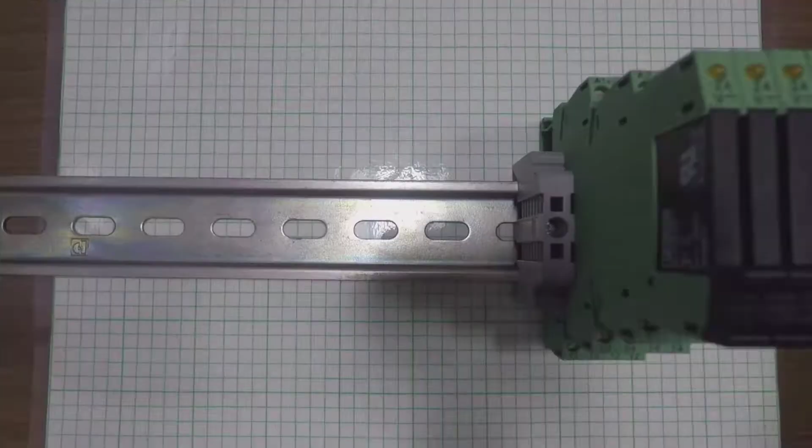We're going to start on a new Solidworks model. We're going to do a DIN rail. DIN is D-I-N, capital D-I-N. It's just a standard, like an ISO standard or an ANSI standard. It's mostly a European standard, and it's a component you can see on the camera here. This is the DIN rail, used to mount different types of electronic components. In this case, relay sockets, relays, terminal blocks, and you can mount things like power supplies and a ton of other stuff. It's very versatile because these things just snap on and off. You don't have to bolt them down, unbolt them, or drill holes. They just snap on and snap off. So it's very useful.

We're gonna model the DIN rail itself, and then later on in the semester we'll do a project where we use that DIN rail to create an electronic assembly as part of our final design project.

So let's go over here and look at the details of the DIN rail. And so here's our DIN rail. This is a cross section through it.

What you're going to do is go to Google and search for an NS 35/7.5 DIN rail. Those numbers relate to the overall width and the overall height of the DIN rail. You'll see that once you get to the data sheet.

And the company that I want to use as a manufacturer—lots of people make these DIN rails because they're all made to the same standard—but Phoenix Contact is one I'm familiar with, so we'll use Phoenix Contact. Do a Google search on Phoenix Contact for an NS 35/7.5 DIN rail made out of zinc-plated steel and a length of 2,000 millimeters.

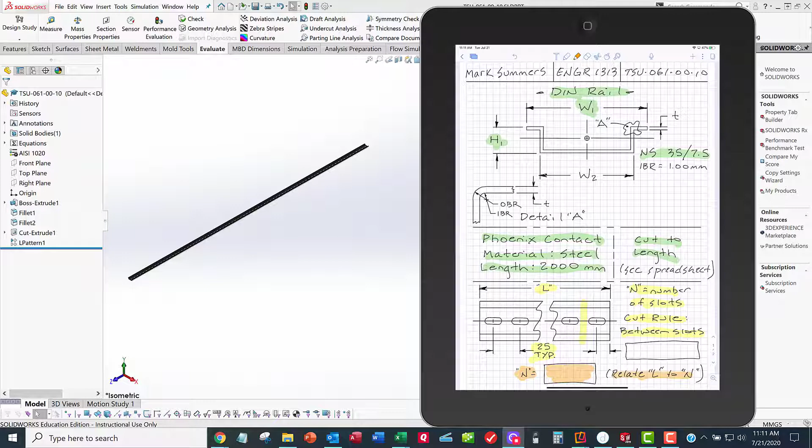So that'll be part of what you do. You find the data sheet, do a Google search, find the data sheet, and once you find the data sheet, then you can go in here and come up with your relationship for N—an equation for N as a function of L—and then we're ready to start the CAD model.

So let's get started.

So here's our finished CAD model, and it doesn't seem right to start from the finish line, so I'm going to say File, New. We've got our templates installed, so I'm going to use my millimeter part template.

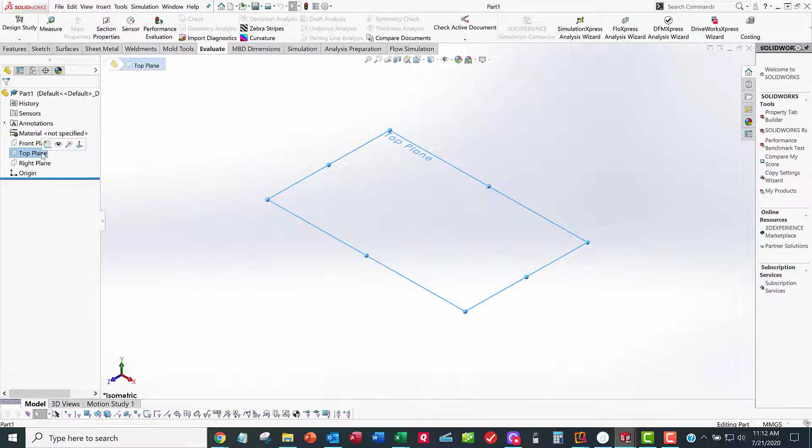I'm going to get my ISO view. I want my orientation of my DIN rail to look just like what you just saw on the screen, so I'm going to go to my ISO view, and I want to do my first sketch on the front plane and extrude normal to the front plane so it's oriented like I want. I want the bottom of the DIN rail to sit on the top plane, and I want the right plane to go right through the middle of the DIN rail.

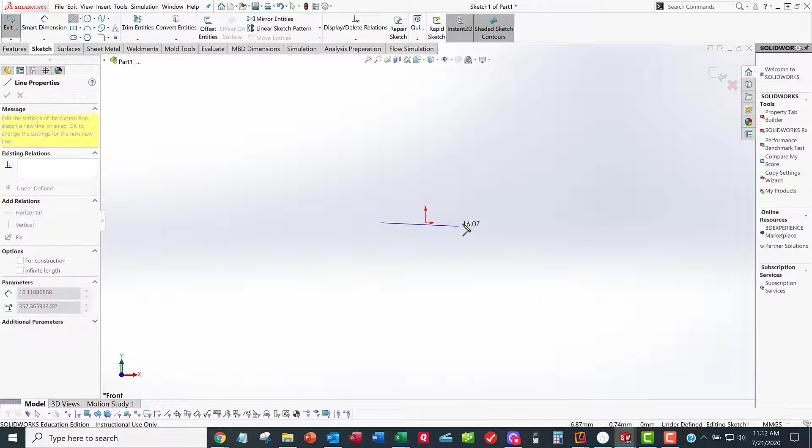So with that in mind, I'm going to select front plane, go to sketch, and sketch on the front plane. I'm going to do my sketch, and I'll leave the fillets off because that's the way I like to do it. I don't like to do my fillets as part of the sketch—I like to do my fillets as a feature.

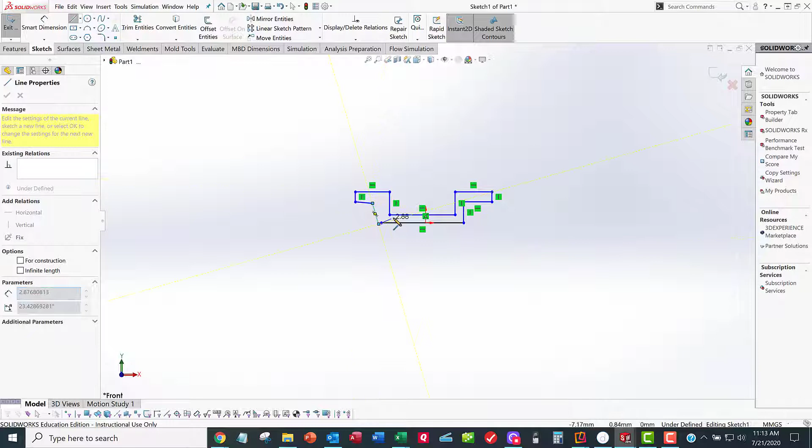Here I'm being somewhat careful to draw my lines horizontally and vertically, and I think I'm doing a relatively good job, but maybe I screwed up somewhere. Right click select to get out of the command. Unfortunately I wasn't paying attention.

So I need to make a closed loop—you always want a closed loop for your extrude sketches. I'm going to select one of these vertices and control click the other vertice, then make a merge constraint to make these two points the same point. Click one, control click the second—they're both in the blue box, and I want to merge them. So that looks good.

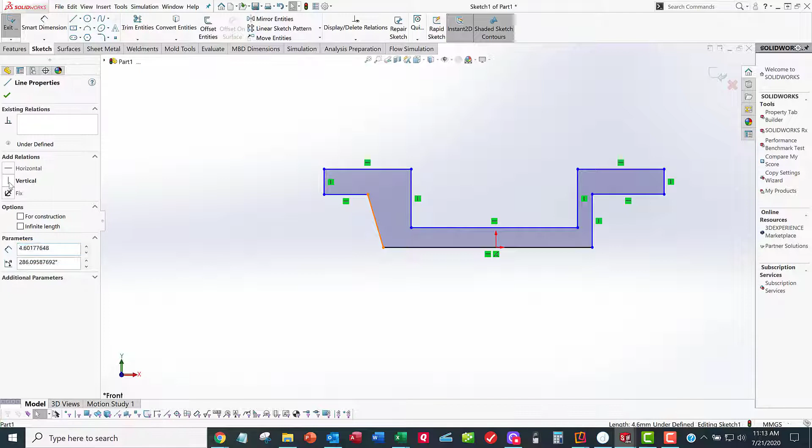It's not great though. This line here should have been vertical, so I'm going to select it and make it vertical. I suspect you'll be paying closer attention when you do your sketch, so you won't have to clean this up, but in case you miss one, that's okay. Here it got kind of cattywampus, but if I drag that over, I get my closed loop.

All right, this is why they call these things sketches. This is not an AutoCAD type drawing where all these line lengths are all the same. This looks horrible, but that's okay because it's a sketch.

What I want to do, like we did on assignment 9, is drag a blue corner around and find something that needs to be fixed, then fix it. I can see that this line and this line need to be collinear, so I'll make them collinear and say okay, then move on to the next thing. What's the next thing? I have no idea until I grab one of these vertices and drag it around.

This thing should be moving along with this thing because these are equal length—this is symmetric about this plane. So I'm going to select this guy, control click this guy, and make these equal length. I keep adding geometric constraints until the entire sketch is geometrically constrained.

Here's another goofball issue—this thing right here should be moving up and down when I move this up and down. I can fix that by making this line and this line equal, or by making this line collinear with that line. Doesn't matter which one you use. So I'm going to select that one, control click that line, select equal.

As I add these constraints, you see them showing up on the sketch here. There's equal, that's got a pair over here—these both highlight together. Here's another equal, here's a collinear. These constraints—you need to get familiar with these symbols. They're kind of hieroglyphic looking at the beginning, but you'll get the idea after a little while.

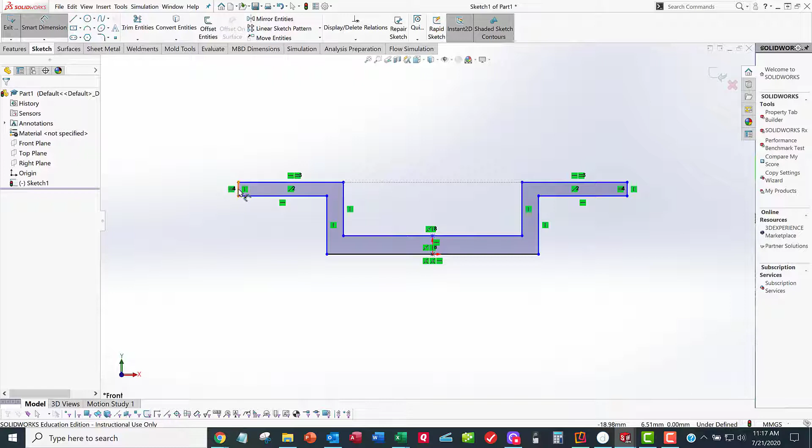I'm going to go to Smart Dimension. I don't go to corners, I go to edges. So there's edge there to this edge here. Click to place it, click to change the number, 35. And I hope these numbers are right. They're probably screwed up. But the data sheet, you got to find your data sheet.

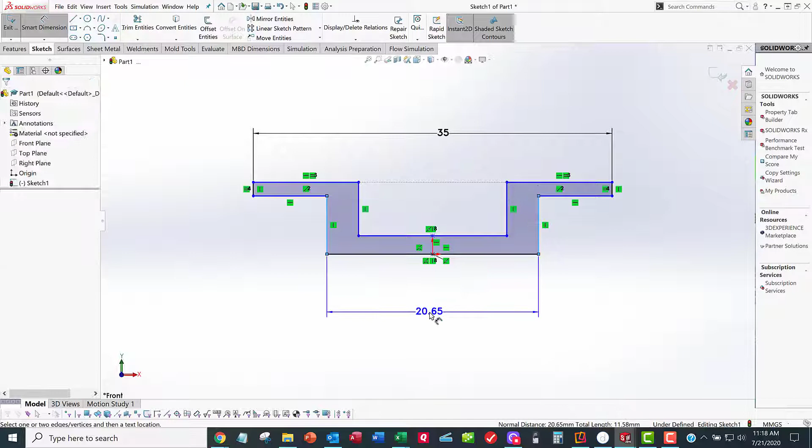And then I want to go, as soon as this thing comes back to life, from this edge to this edge, I think it's 27. Click to place, click to change, 27. Here to here is 7.5.

Now the thickness of this thing is 1 millimeter, and so I want to go from here to here. It starts off with a, whoops, that's not what I wanted. What in the wild world of sports is going on here? Smart Dimension, here to here.

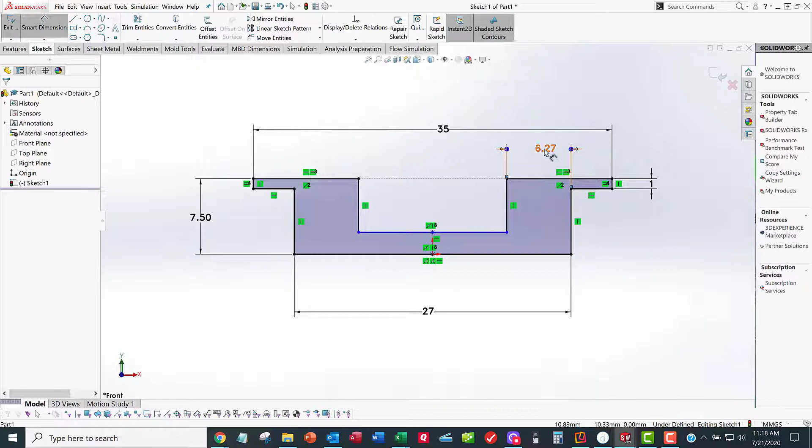There we go. Click to place, click to change, 1 millimeter. Here to here, it's also 1 millimeter. The thickness of the part doesn't change because it's stamped out of a single piece of steel. So all of these are going to be 1 millimeter.

And I go around the horn here, and the thing's starting to turn black. Wait a minute, fully defined. Why didn't I have to define this width here as 1 millimeter? Well, because of these other geometric constraints.

So I want a minimum number of dimensional constraints. I don't want to have a bunch of numbers on here. I want to have geometric constraints and a minimum amount of numbers. And all these numbers are on your data sheet.

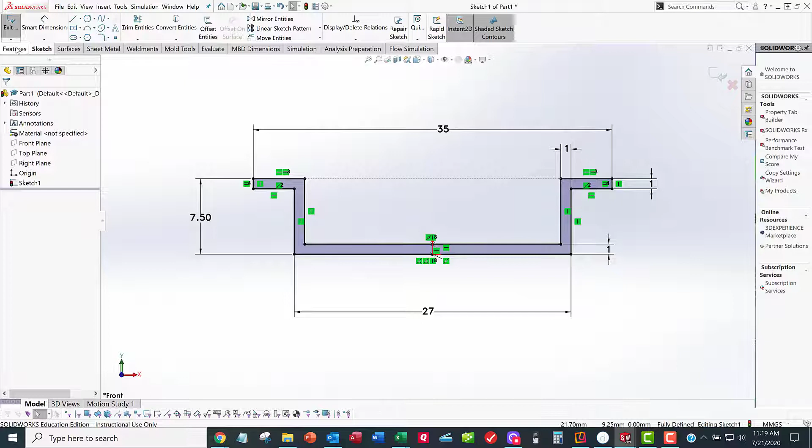No more than what's on the data sheet. So once you get fully defined, you can get out of the sketch. I'm going to do a space bar and do an ISO view. I want to pre-select the sketch, go to the Feature tab, Extrude Boss Base, 2000 millimeter depth. Boom, I got my first feature.

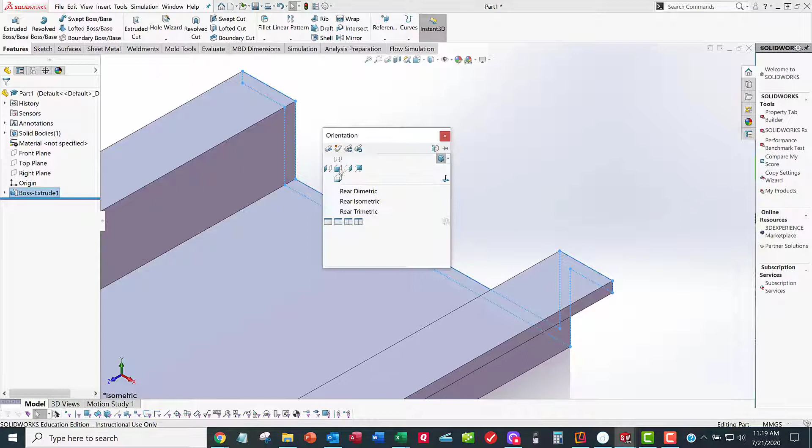Now it's time for the slots. Spacebar, I want to look down from the top. I want to come over here where the origin is, because I want a dimension from the origin to the slot. I want to sketch on this face right here, so I'm going to say Sketch.

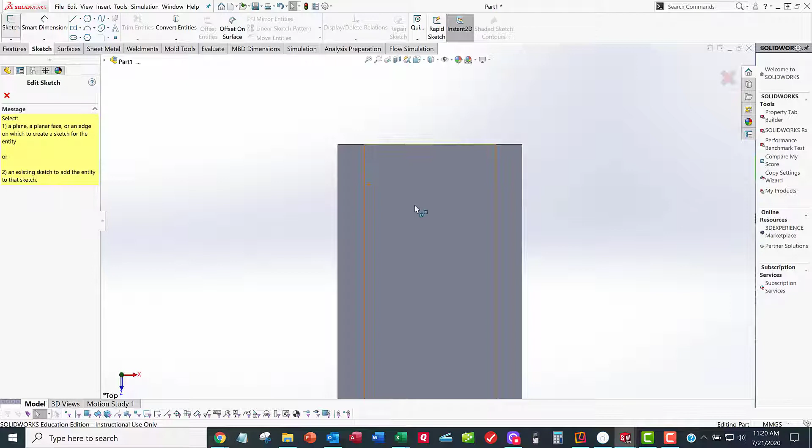Come on, baby. I don't want to wait. Sketch, tab, sketch, select that face. Now I'm in sketch mode. I can tell I'm in sketch mode because of this and the buttons pushed down.

Now it's time for a slot. I could do circles and lines, but I'm too lazy. I want to choose a straight slot. I want to click right there, boom. I want to click right there, boom, and I want to click right there, boom. Right click select. Now I've got my geometrically constrained slot.

Now all I need is dimensions. So I'm going to go Smart Dimension. I want the width of the slot. And I don't remember what the number is. This is probably wrong, so don't copy it.

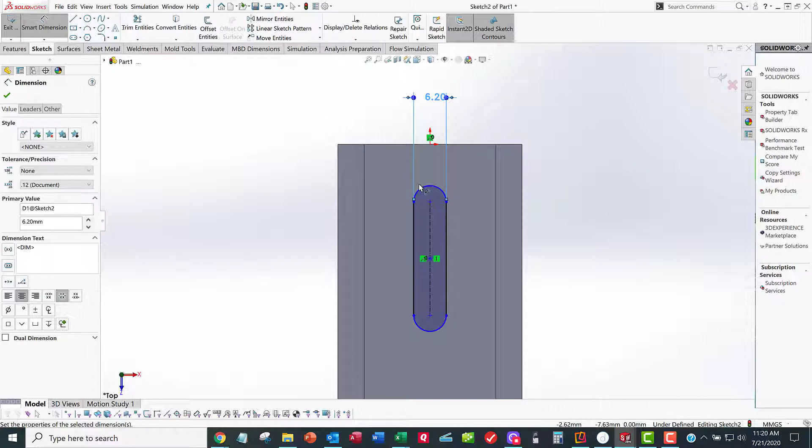Look at your data sheet. I want to go from, I want to dimension the length of the slot. This is 15, I think. I don't know, check all these numbers.

And I need the slot located to the edge. Well, I don't have anything on the edge here, but I've got this edge here that's not in the sketch, but it's part of the model. So I can dimension from this edge to the center of the slot.

And if the slot distance is 25 between slots, I know that the slot to the edge is half of that, because I want to cut the DIN rail equally distanced between each slot.

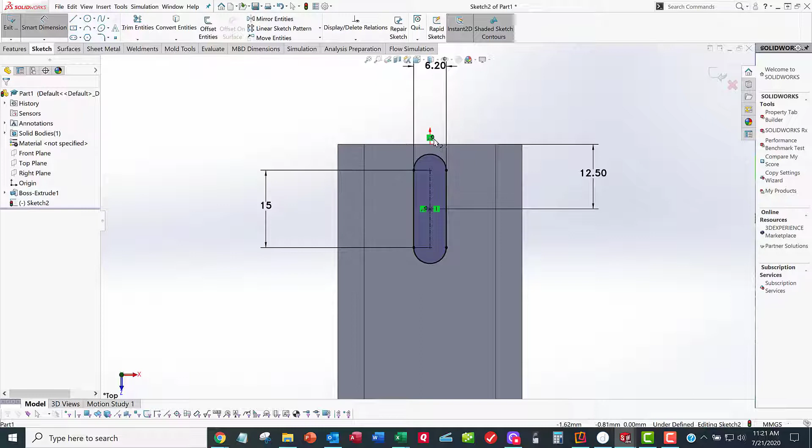Now something's wrong here. This dimension of 15 is correct, but it's dimensioning to the center of the arc. It's supposed to be dimensioning to the total length of the slot.

And so I'm going to select this dimension, and not knowing what to do, I'm going to right click on it, and I want to select it. I get my properties box over here, and I've got all kinds of options that I don't know what they mean. But one of the options here, under leaders, is arc condition: first arc condition, second arc condition.

I don't want a dimension to the center. I want to go to the max. So watch what I click this button. Watch what happens.

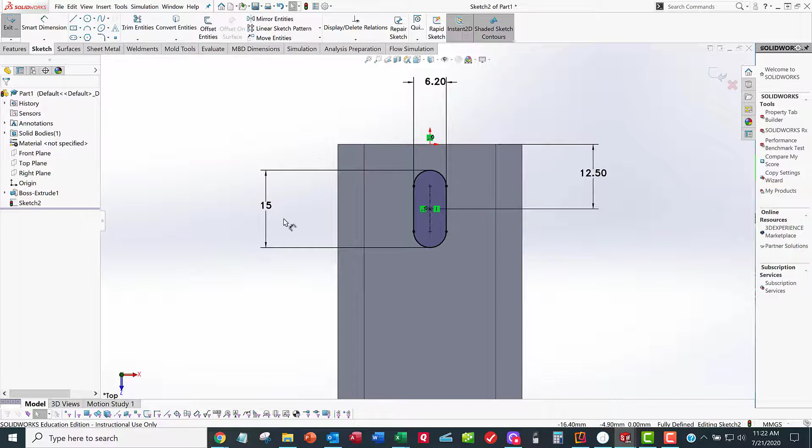Takes me to the maximum distance, which is the quadrant of that fillet or radius. I'll do the same for the second arc condition, and they'll both pop to the outside edge. That's what I want. Now the number's not right, so I'll go back and put in the correct number. Now what do I have? A beautiful thing, because it's fully defined with 3 dimensions, that's all I need. I don't want extra dimensions, I want everything geometrically constrained.

Now I'm going to spacebar to ISO view and look down on this thing. Now I'll do an extrude cut. I'll select the sketch, go to features, and do extruded cut. It's going to go 1 millimeter through, but that's not my design intent. My design intent is through all, in case the thickness changes.

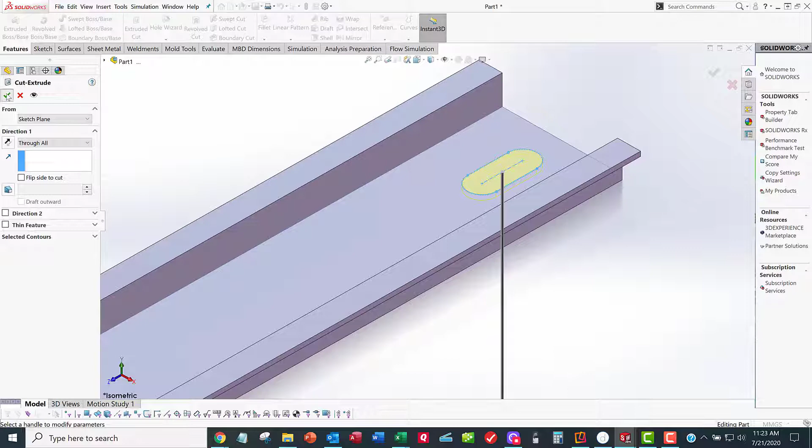So now I've got 1 slot. I've got to do this 79 more times. There's 80 slots in a 2,000 millimeter long DIN rail, and it seems ridiculous to do the same thing 79 times more. So I'm going to do a pattern instead. Patterns seem like the way to do it.

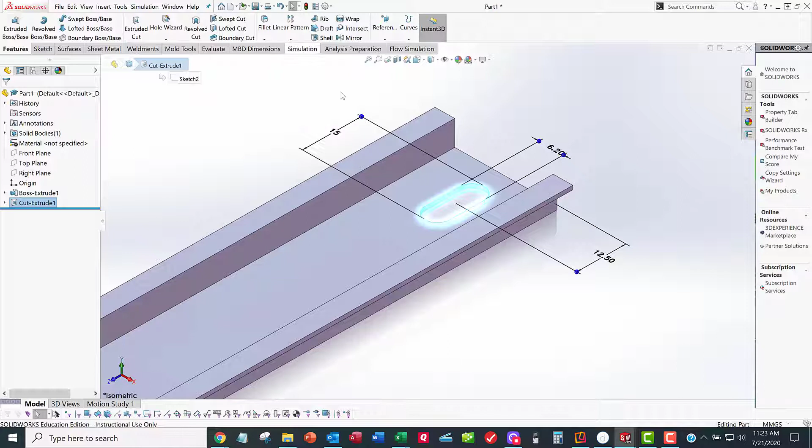So I want to pre-select the sketch, pre-select the feature. The sketch is underneath the feature, and these are all fully constrained because there's no minus signs, so I haven't lost 5 points yet. I'm going to pre-select this feature, come up here and find linear pattern. There's lots of patterns, but the one I want is linear pattern. I've already pre-selected the feature, so it knows which one I want to pattern.

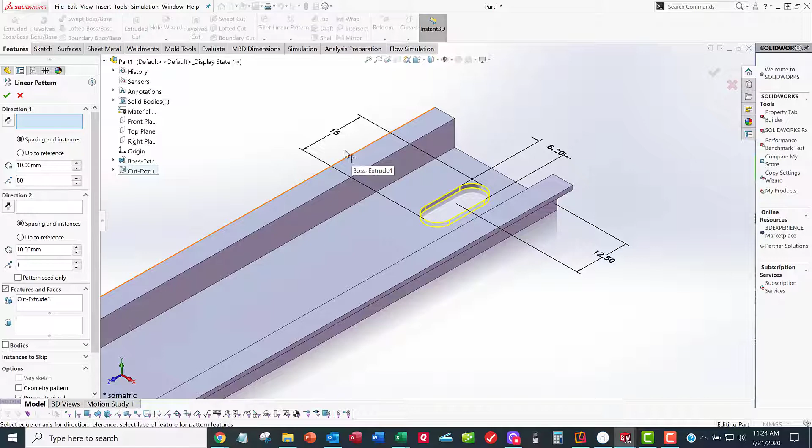Direction 1, I have to somehow define. I can define direction 1 by the front plane, going perpendicular to it. I could grab this edge - that edge is also along the direction I want. So any kind of feature you can find will define the direction.

Now I'll come down here. It asks, what's the distance between each instance? Well, it's not 10, it's 25. It gives me a nice preview, and there's 80 of them total, so I'm done. Boom. Now that feature gets replicated 79 more times, 80 total.

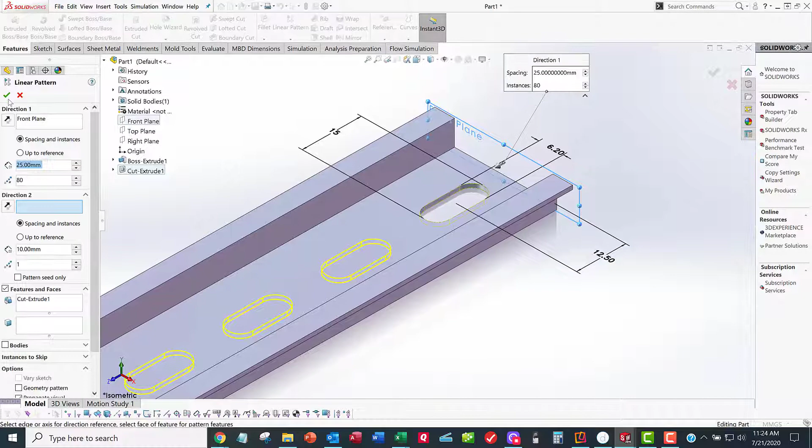And now it's a beautiful thing. It goes all the way to the other end down here. All right, now what do I need? Well, I need these fillets.

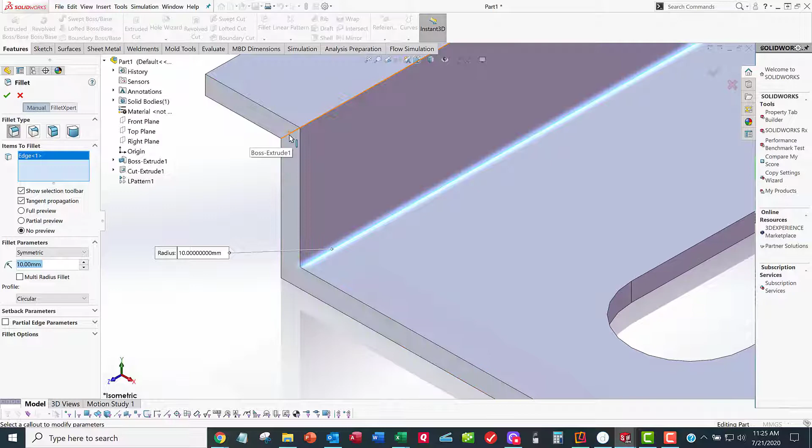We've got 4 inside bends and 4 outside bends, and you need to figure out what those values are. So you're going to go to your fillet command, grab the 4 inside edges, and remember you can grab these edges. I can see that one, so I can easily grab that edge and group all these together - group the 4 inside bends together, then have another fillet command to group the outside. I can't see that outside edge here, but if I can look through it with my mouse, there's the edge right there.

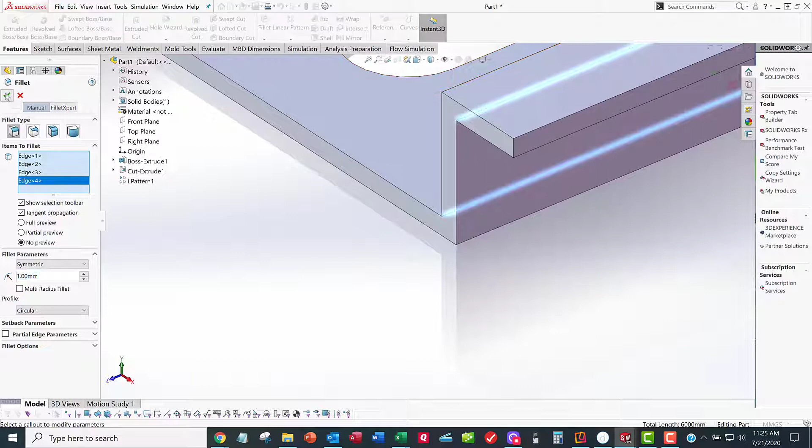I can't see this one. I could spin it around, but you know me, I'm lazy. There's an inside edge, and there's another inside edge, so I got all 4 inside edges. The inside fillet, inside bend radius is not defined on the data sheet for some unknown reason, but it's 1 millimeter.

Now you're going to do the outside bend radius with another fillet command. Then you're going to apply your material based on the data sheet, and then you're going to be done with part 1.

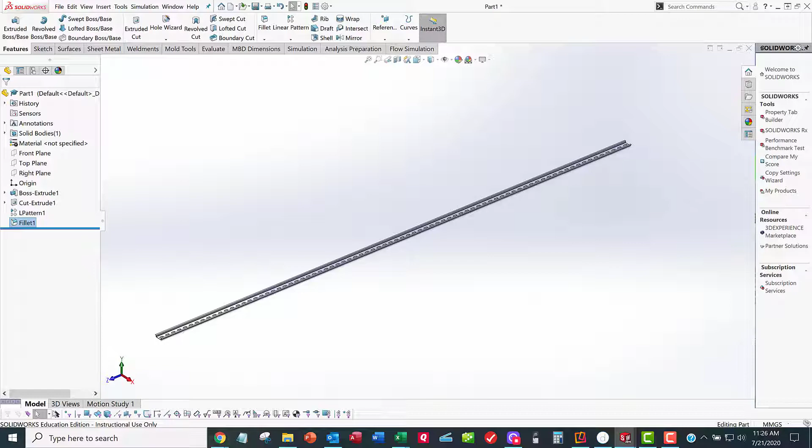But part 1 is going to get us to what? It's going to get us to a good model. I want to make this model so that I can change one global variable and have this thing update the length and the number of slots at the same time. So once you get through with this in class today, I'm going to pull the trigger and show you how to turn it into a great model. Why have a good model? Good models are good, but we're not going to deal with good - we're going to deal with great.

All right, so that takes care of preliminary discussions about assignment 10, our beautiful DIN rail.